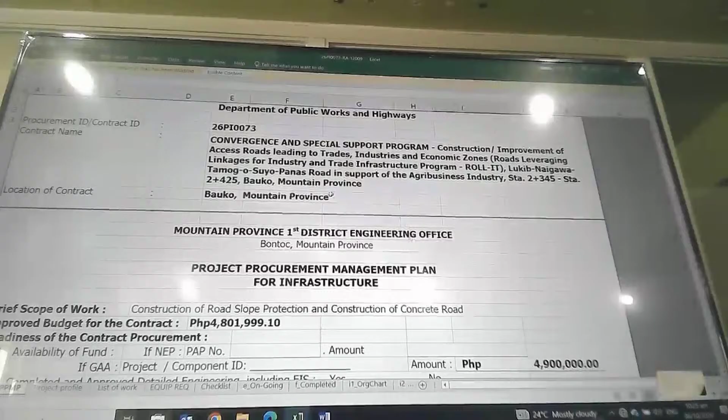So, what contract is it, Sir? So it's your turn, Sir Bob. The first project presentation today is under CSSP with contract ID 26PI0073.

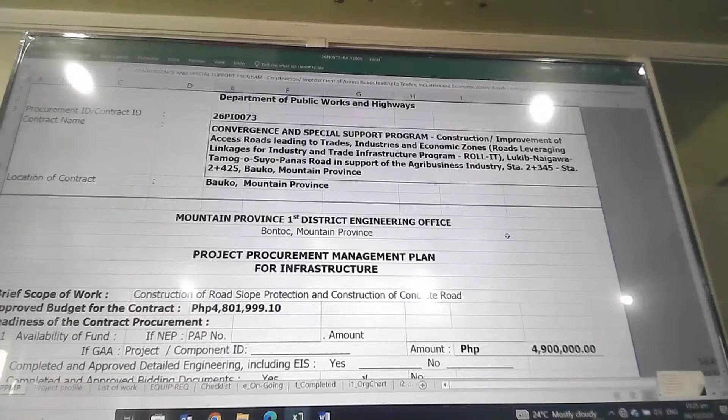Contract name: Convergence and Special Support Program, Construction and Improvement of Access Roads leading to trades, industries, and economic zones, Road Leveraging Linkages for Industry and Trade Infrastructure Program, Lukib-Naigawa-Tamog-o-Suyo-Panas Road in support of the agribusiness industry, Station 2+345 to Station 2+425, Bauko, Mountain Province. Location of contract is at Bauko, Mountain Province.

The approved budget for the contract is 4,801,999 pesos and 10 centavos, with a contract duration of 44 calendar days. Procurement method: competitive bidding.

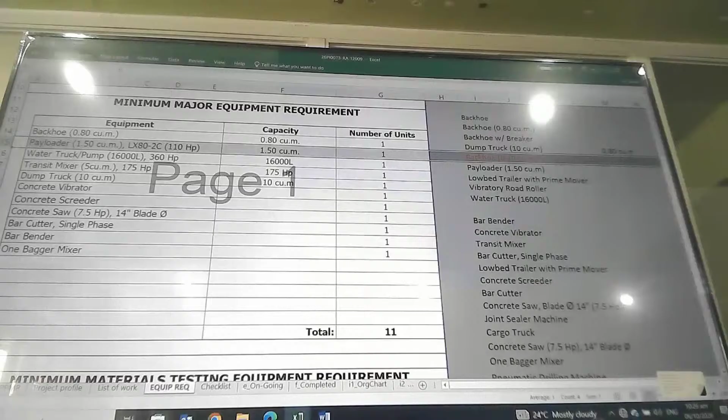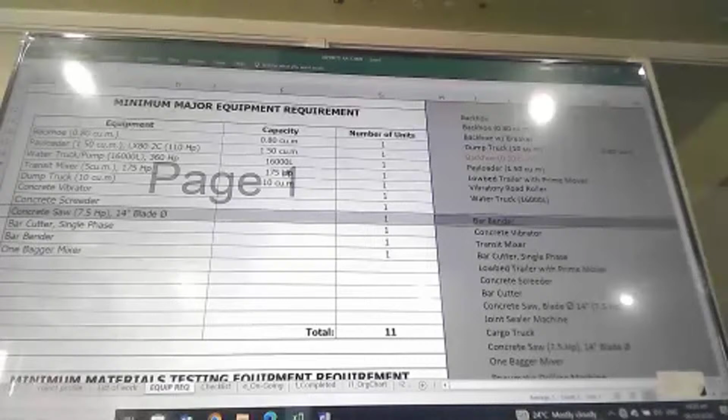For the minimum major equipment requirement, we have one backhoe (0.80 cubic meter), one payloader (1.5 cubic meter), one water truck, one concrete vibrator, one concrete saw (14 inches blade diameter), and one bagger mixer.

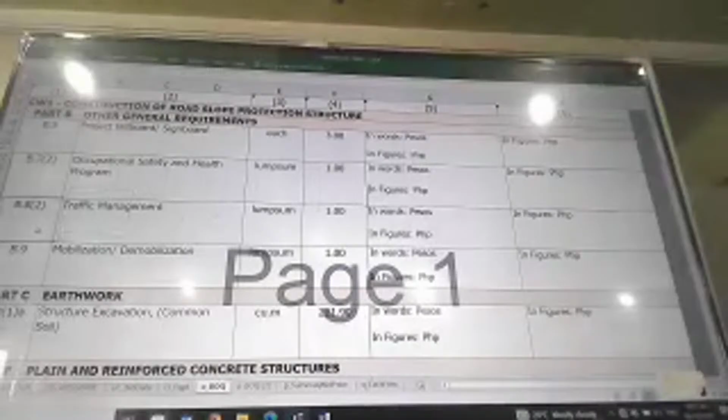For the bill of quantities, under Part B, Other General Requirements, we have item B.5 Project Billboard/Signboard - 3 each; B.7 Occupational Safety and Health Program - 1 lump sum; B.8 Traffic Management - 1 lump sum; B.9 Mobilization and Demobilization - 1 lump sum.

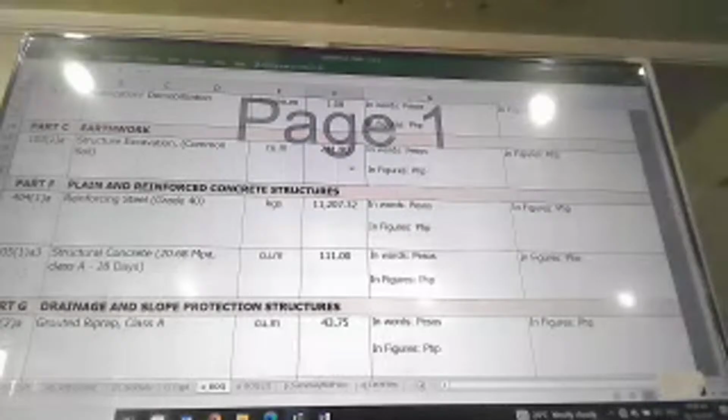And under Part C, Earthworks, we have item 103(1)A Structural Excavation, Common Soil - 211.9 cubic meters.

Under Part F, Plain and Reinforced Concrete Structures, we have item 404(1)A Reinforcing Steel Grade 40 - 11,207.32 kilograms, and 405(1)A3 Structural Concrete, 20.68 megapascal, Class A, 28 days - 111 cubic meters.

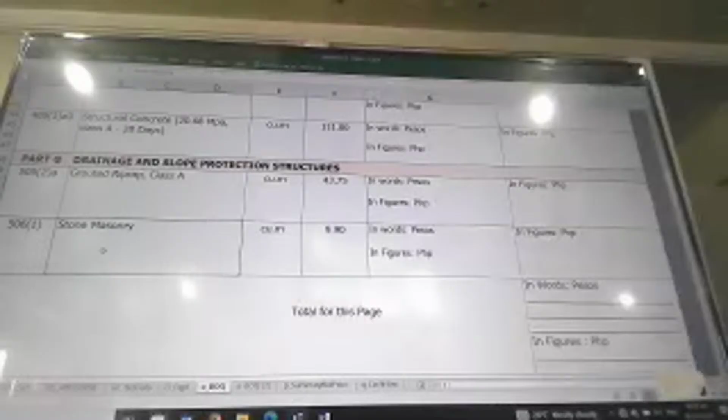Under Part G, Drainage and Slope Protection Structures, we have 505(2)A Grouted Riprap Class A - 43.75 cubic meters, and 506(1) Stone Masonry - 9.80 cubic meters.

Under CW2, Construction of Concrete Road, Part C Earthworks: item 102(2) Surplus Common Excavation - 949.50 cubic meters, and 104(1)A Embankment from Roadway Structure Excavation, Common Soil - 166.52 cubic meters.

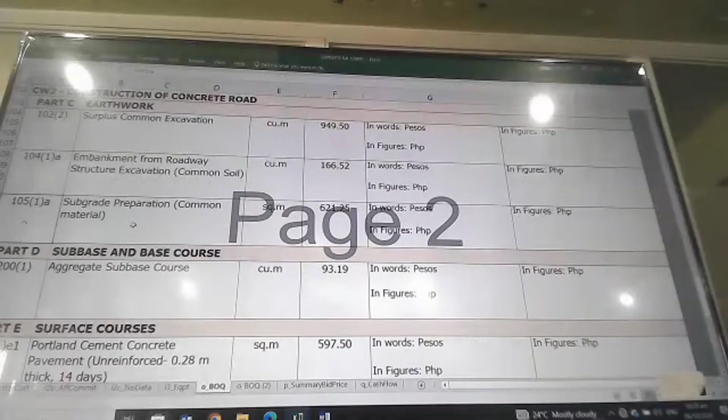105(1)A Subgrade Preparation, Common Materials - 621.25 square meters. Part D, Subbase and Base Course: 200(1) Aggregate Subbase Course - 93.19 cubic meters. Part E, Surface Courses: 311(1)E1 Portland Cement Concrete Pavement, unreinforced, 0.28 meter thick - 597.50 square meters.

The last one, Part H, Miscellaneous Structures: we have PIF 604 Curb and Gutter, cast in place - 44 linear meters.

So for the detailed engineering design plan of this project: Convergence and Special Support Program, Construction and Improvement of Access Roads leading to trades, industries, and economic zones, Road Leveraging Linkages for Industry and Trade Infrastructure Program (ROLIT), Luque-Naigawa-Tamugo-Suri-Panas Road, in support of the agribusiness, Station 2+345.

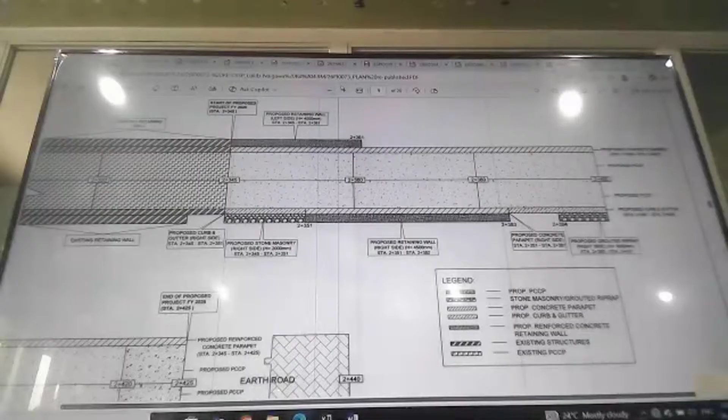So the end of the proposed project is at Station 2+425. Now for the cross-section.

So for the typical details of the retaining wall, we have the front elevation of the retaining wall and the RSB schedule and bar bending diagram. And we have the design parameters.

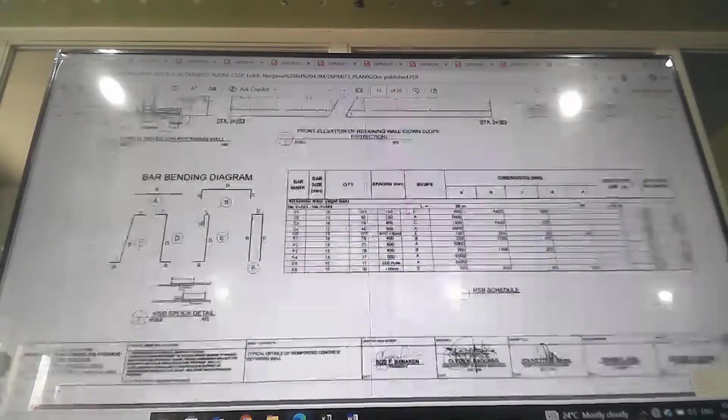We have the stone masonry elevation detail and the grouted riprap elevation detail. We also have the typical curb and gutter details, detail of the walls, and the tie bar details for the PCCP.

And for the concrete parapet, we have the reinforced details of the reinforced concrete parapet, the RSB schedule of the concrete parapet, and the bar bending diagram of the concrete parapet.

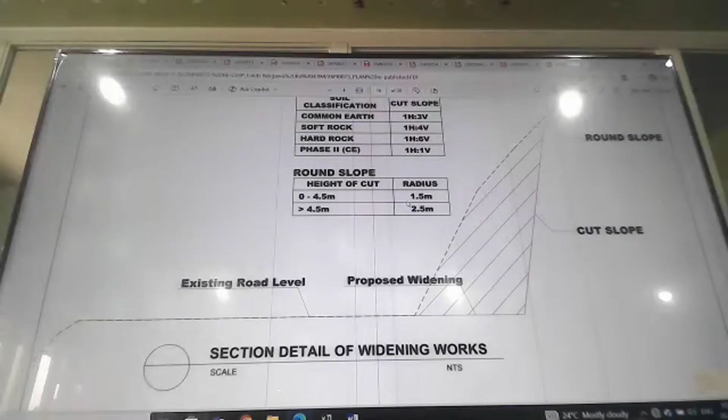So for the section detail of widening works. Next, we have the PCCP details.

For the billboard and billboard frame details, and for the traffic management layout.

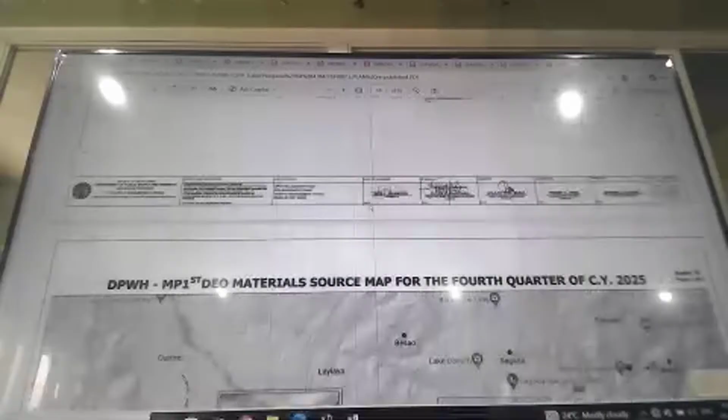For the aggregate source at Mangawa Baoko, ang Pinto, Slope Quarry, and for the boulders at Anuling Cervantes Ilocos.

So with the incoming materials selected from Mangawa Baoko, Mount ang Pinto, Slope Quarry.

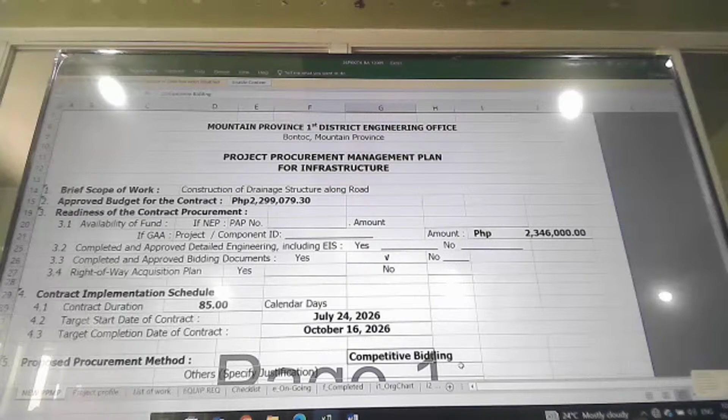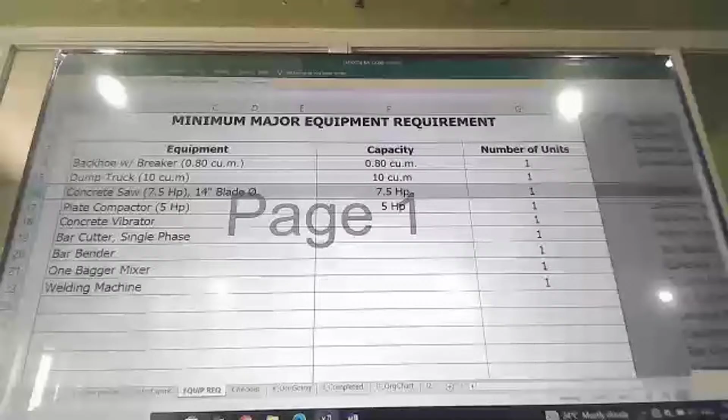For the minimum major equipment requirement, we have one backhoe with breaker, 0.80 cubic meter capacity, one dump truck, one dump truck 10 cubic, one concrete saw 14 inches blade diameter, one plate compactor, one concrete vibrator, one bar cutter single phase, one bar bender, one bagger mixer, and one welding machine.

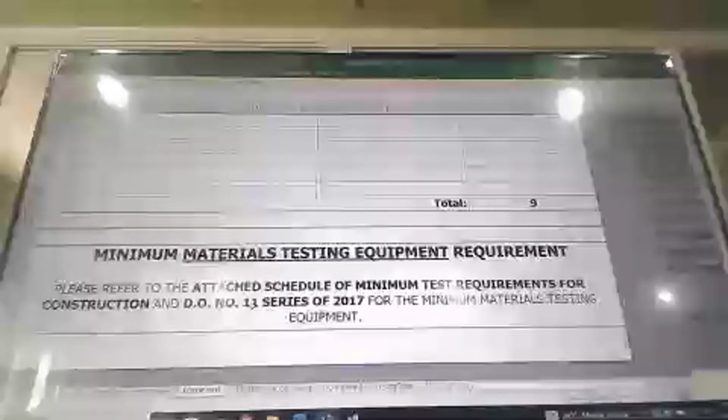With total units of 9 units. Please refer to the attached schedule of minimum test requirements for construction and D.O. number 13 series of 2017 for the minimum materials testing equipment.

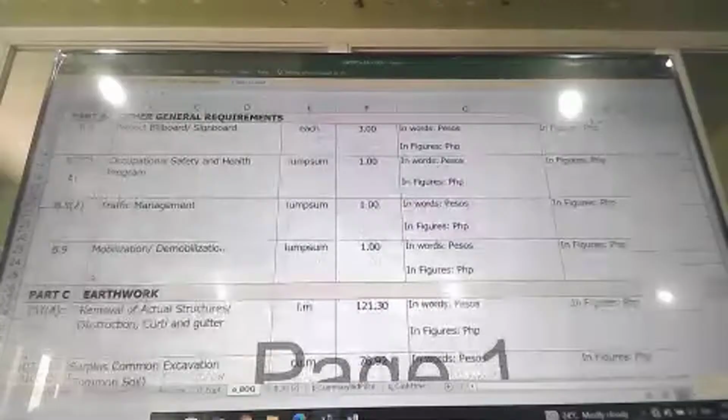For the bill of quantities under Part B, general requirements, we have item B.5 project billboard signboard, 3 each. B.7.2 occupational safety and health program, 1 lump sum. B.8.2 traffic management, 1 lump sum.

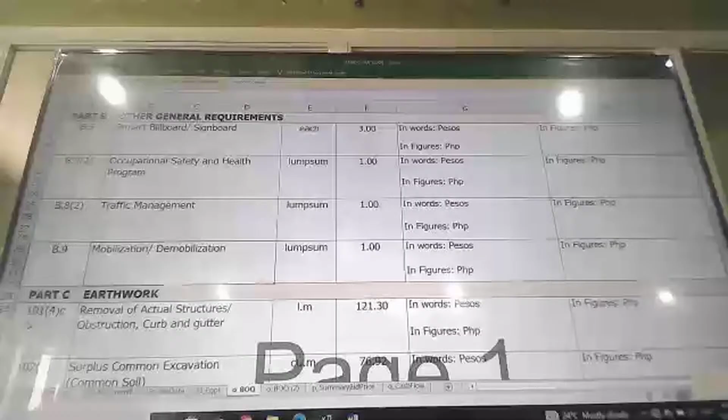Demobilization 1. Earthwork: we have 101 removal of actual structures, obstruction, curb and gutter, 121.30 linear meter. We have 102 surplus common excavation, 76.92 cubic meter. 103-1A structure excavation common,

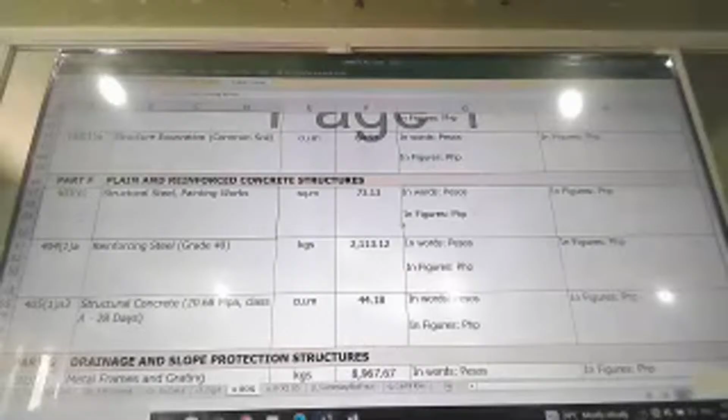84.52 cubic meter. Part F plain and reinforced concrete structures. Item 403-6 structural steel painting works, 73.13 square meter.

404-1A reinforcing steel reinforcement, 2,113.12 kilograms. 505-2A grouted riprap, 40.23 cubic meter.

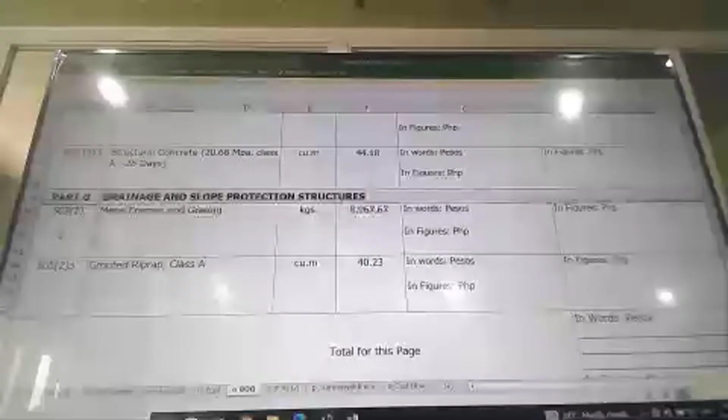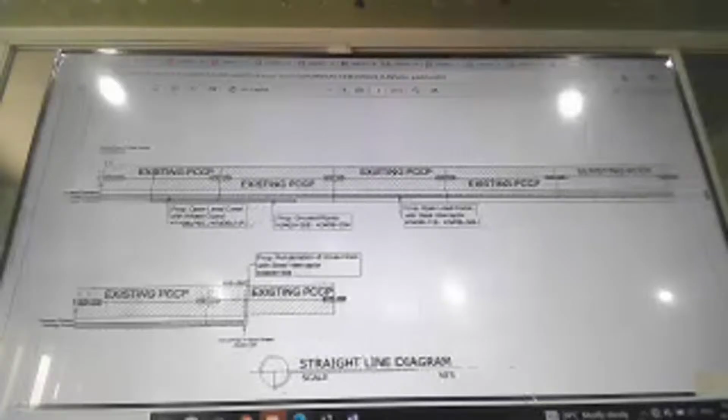For the straight line diagram, from kilometer 408 plus 368 to kilometer 408 plus 294, we have a proposed grouted riprap. And for the start of the project at kilometer 408 plus 265, we have a proposed open lined canal with wheel guard until kilometer 408 plus 316. And then from kilometer 408 plus 316 to kilometer 408 plus 384, we have open line, proposed open lined canal with steel interceptors.

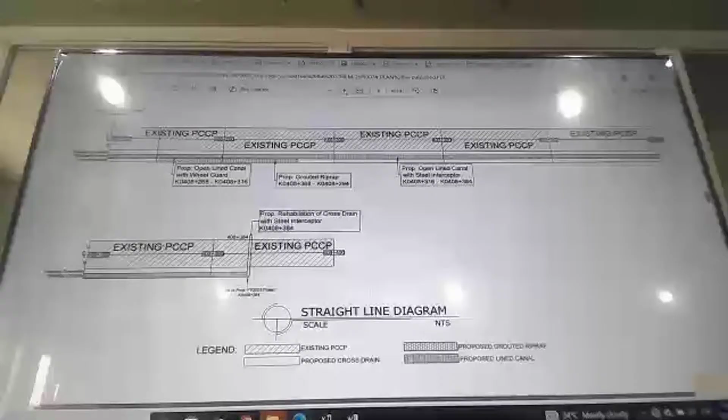And from kilometer 408 plus 384, cross drain with steel interceptor. For the cross sections,

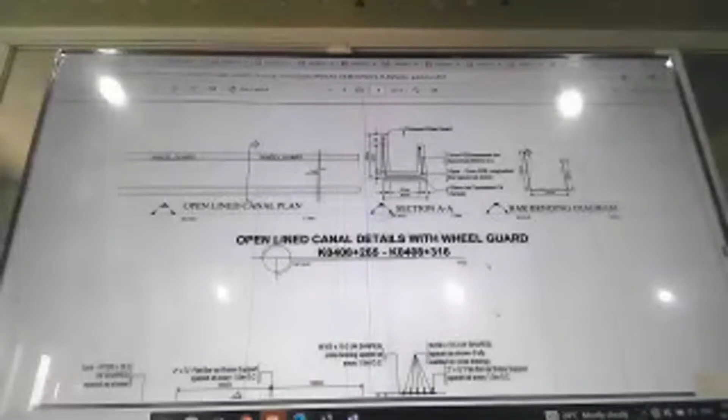Open line canal details with wheel guard from kilometer 408 plus 265 to 408 plus 316. The bar bending diagram, the sections, kilometer 408 plus 316 to kilometer 408 plus 384.

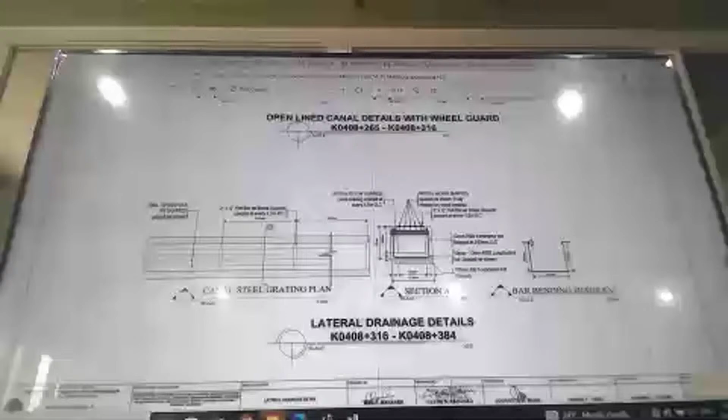And the elevation of line canal with wheel guard. And for the grouted riprap elevation detail from kilometer 408 plus 268 to kilometer 408 plus 295.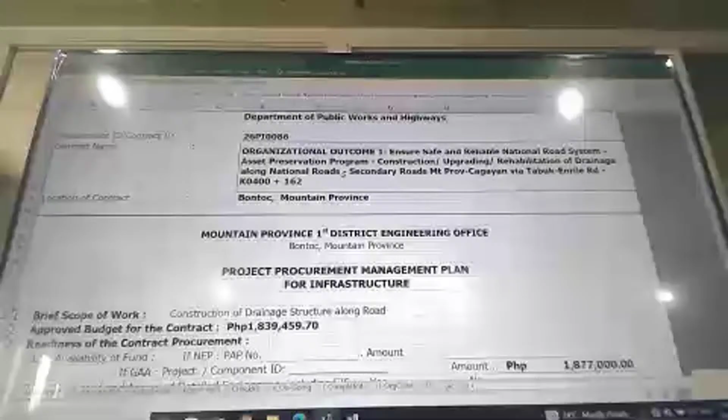26PI0086, contract name: Organizational Outcome 1, ensure safe and reliable national road system, asset preservation program, construction, upgrading, rehabilitation of drainage along national road, secondary roads, Mount Province, Cagayan via Tabuk-Enrile Road.

Kilometer 400 plus 162. Contract location is Bontoc, Mountain Province.

The approved budget for the contract is 1,839,459 pesos and 70 centavos. Contract duration is 71 calendar days.

Minimum equipment requirement: one dump truck, 10 cubic meter capacity; one backhoe, 0.30 cubic meter capacity; one bagger mixer; one concrete vibrator; one bar cutter single phase; and one bar bender.

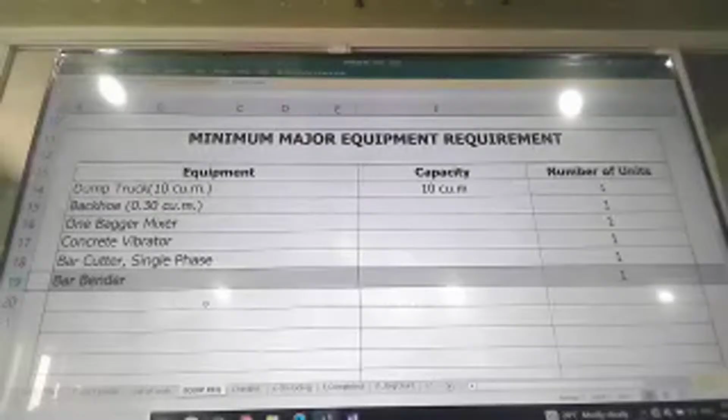Total of 6 units. Please refer to the attached schedule of minimum test requirement for construction, MDU number 11 series of 2017, for the minimum materials listing equipment.

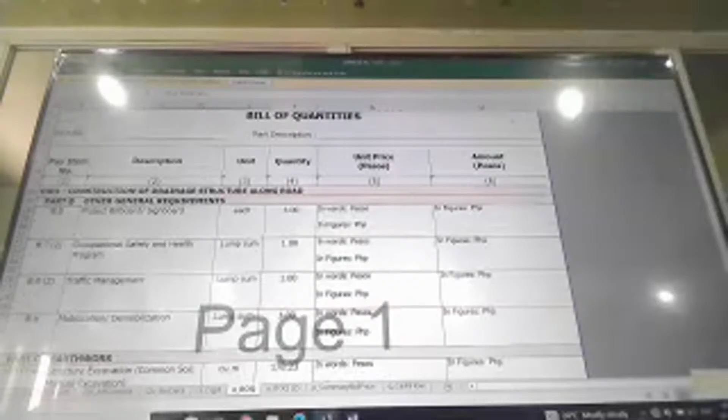For the bill of quantity, for civil work 1, construction of drainage structure, part B, other general requirements, item B.5, project billboard signboard, 3 each.

B.7(2), occupational safety and health program, 1 lump sum. B.8(2), traffic management, 1 lump sum. B.9, mobilization, demobilization, 1 lump sum.

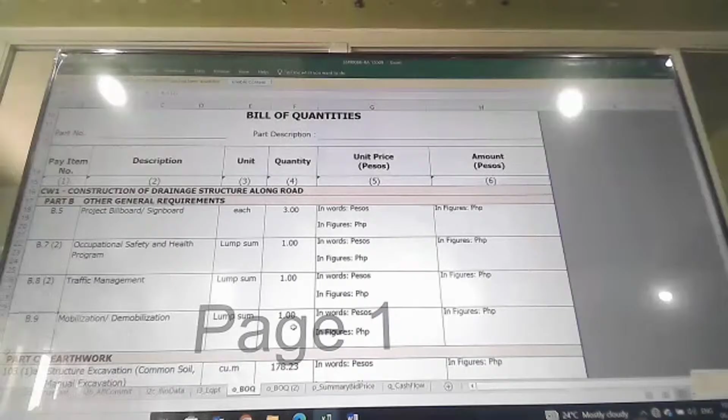Under part C, earthwork, item 103(1)b, structure excavation, common soil, manual excavation, 20.71... 178.23 cubic meter.

Part F, plain and reinforced concrete structure. Item 404(1)a, reinforcing steel grade, 2,488.27 kilograms.

405(1)a3, structural concrete, 20.68 megapascal class A, 28 days, 47.72 cubic meter.

For part G, drainage and slope protection structures, item 505(2)a, grouted riprap class A, 103.60 cubic meter. 506(1), stone masonry, 30.60 cubic meter.

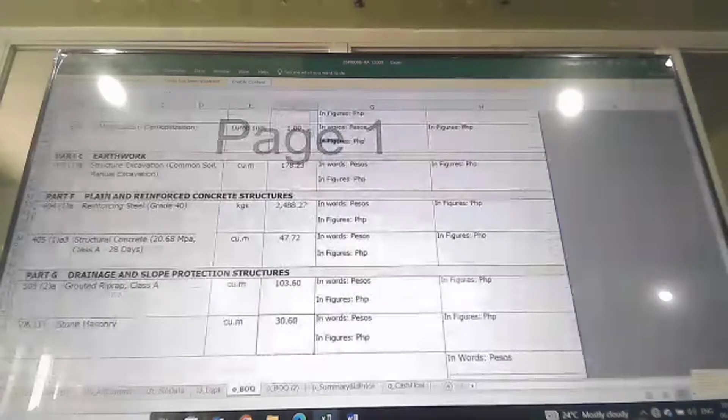Plan for the Organizational Outcome 1, ensure safe, reliable national road system, asset preservation program, construction, upgrading and rehabilitation of drainage and national roads, secondary roads, Mount Province, Cagayan via Tabuk-Enrile Road, kilometer 400 plus 162.

Location: Bontoc, Mountain Province. Station limits, station 0 plus 00 to station 0 plus 080. This is the drainage downstream. Net length is 80 linear meters.

That's for the cross section, typical section, dimension—

So, open canal with the proposed grouted riprap from both sides. Dimension of the open canal is 150 mm.

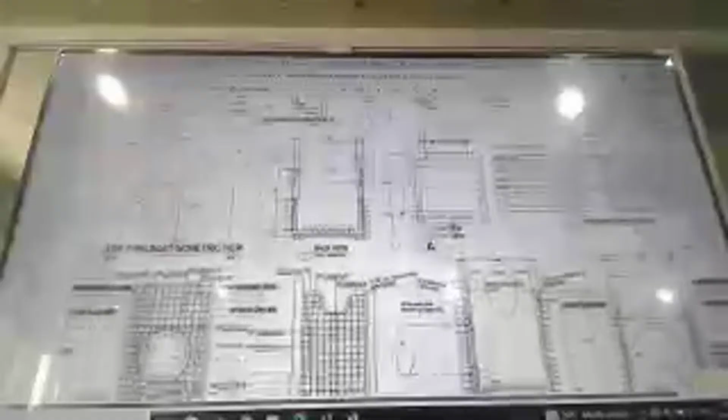For the inlet section detail, bar bending diagram for inlet.

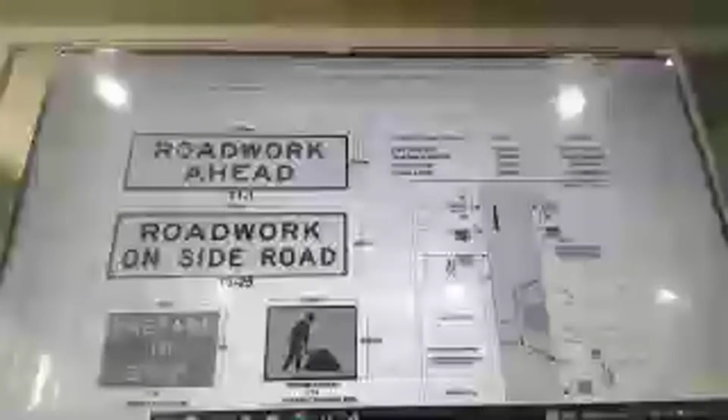For the traffic management layout, and the DPWH and Pavement frame.

For the material source now: cement source, Bontoc Hardware. For the RSB, Manila. Coarse and fine aggregates, Bontoc. Same with the boulders.

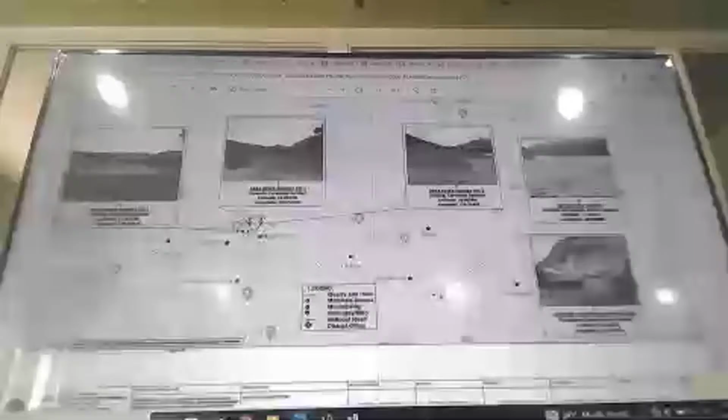Thank you, sir. Bob, kindly return to the traffic management for reminders. Please be informed that this traffic management is still non-reflectorized.

Don't worry, because it is already included as an item. So please comply—this is very important in our partnership in development. Please note it on this traffic management. Thank you.

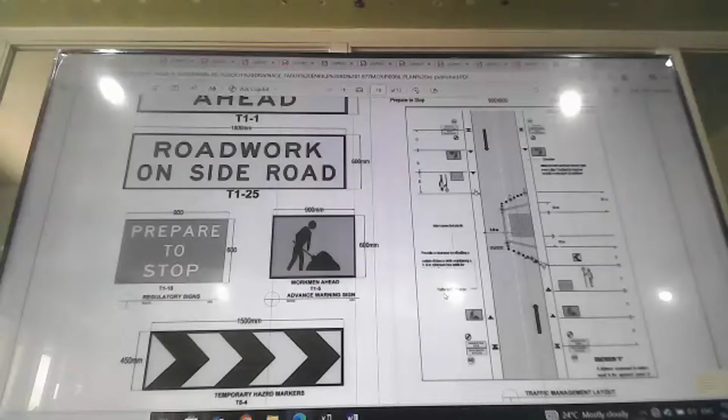So maybe for the information of our prospective bidders, may I call for the contractor who needs to attend? Okay, so Robert Tekliga, Inabo Construction.

Sir Renato, what can you provide? Let's pass to the second level.

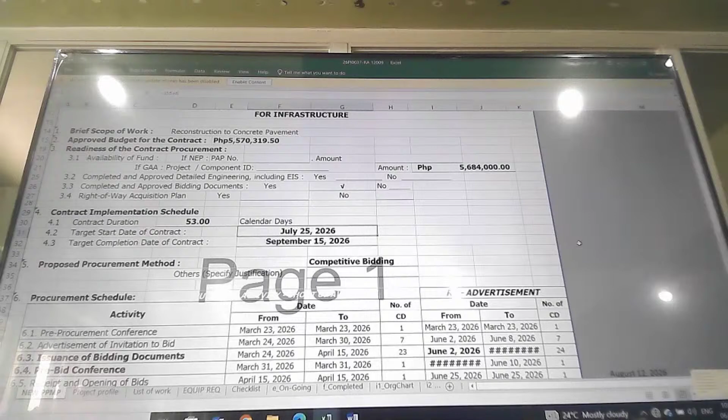RE-ITB. Planning section, who made the design for this 26/0037? 26/0037, Bayatew, damaged roads, secondary roads, asset preservation, reconstruction, upgrading of damaged roadway.

Sir Kenneth Libawan, what particular contract ID do you have? One for four.

For the project 25PI0144, with a contract name of Capital Outlay QRF Rehabilitation of Disaster-Related Infrastructure and Other Facilities, damaged infrastructure due to Tropical Cyclone Nando.

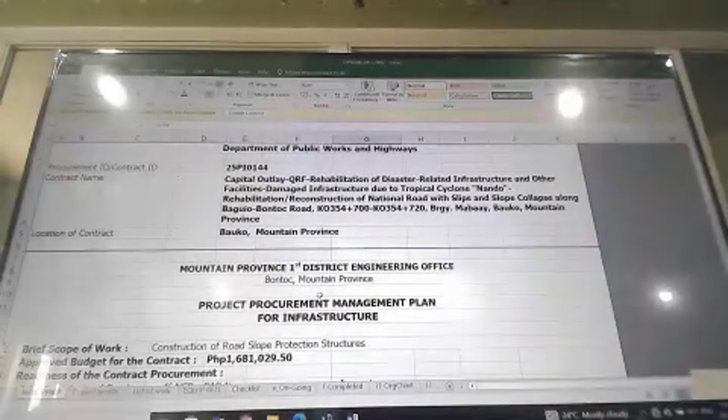With an ABC of 1,681,029 pesos and 50 centavos, with a contract duration of 35 calendar days.

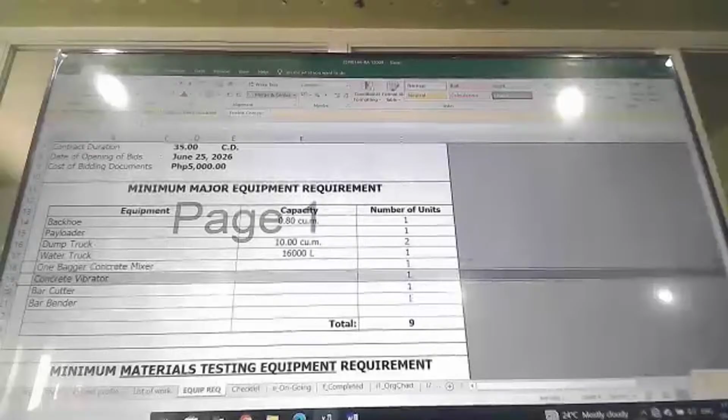1 bagger concrete mixer, 1 unit; concrete vibrator, 1 unit; bar cutter and bar bender, 1 unit; with a total of 9.

For the quantities: item B.5, project billboard signboard, 2 each. B.7(2), occupational safety and health program, 1 lump sum.

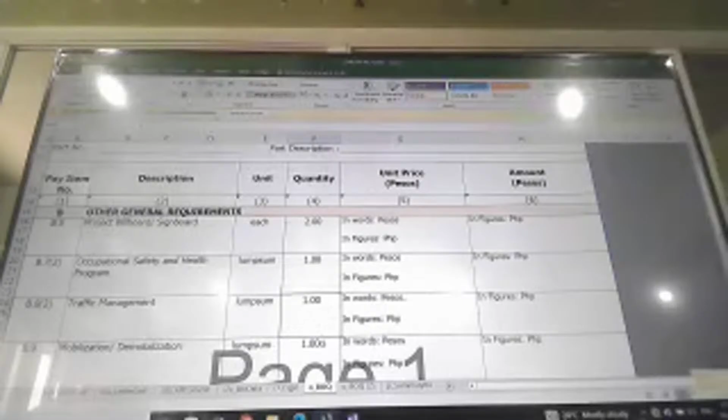B.8(2), traffic management, 1 lump sum. B.9, mobilization, demobilization, 1 lump sum. For Part C, earthworks: 10318, structure excavation, common soil, 133.81 cubic meter; 1044, earth berm, 19.63.

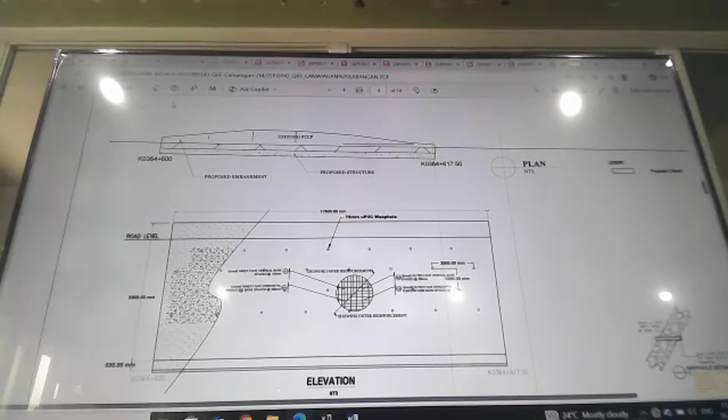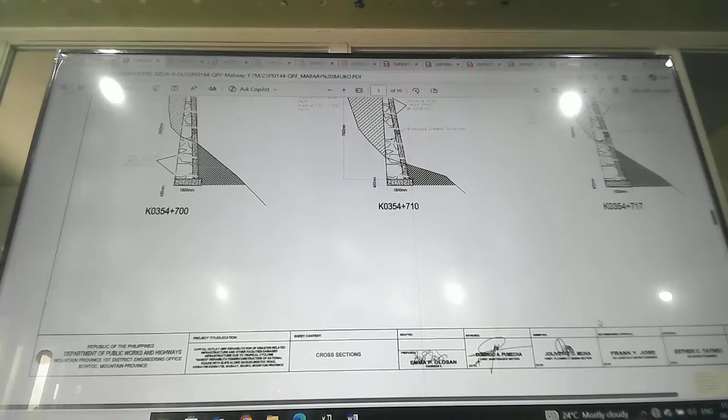About the PCCB, for future funding. What kind of materials is there? Because earth berm. It will be from excavation. I think the excavated materials is not suitable for earth berm. Yes, sir, because that is why our structures fail or collapse due to inconsistency. Yes, sir, so please check on that.

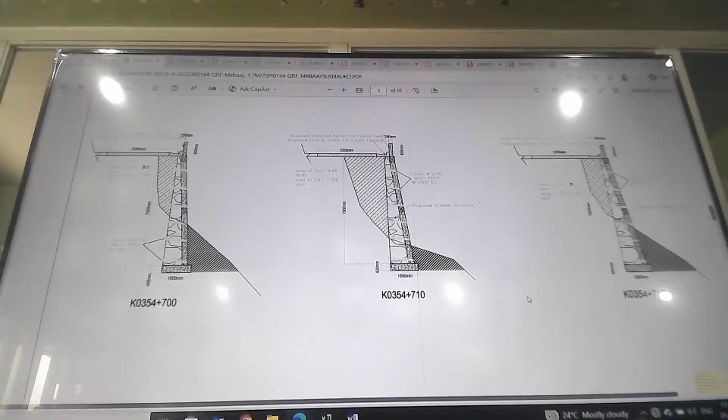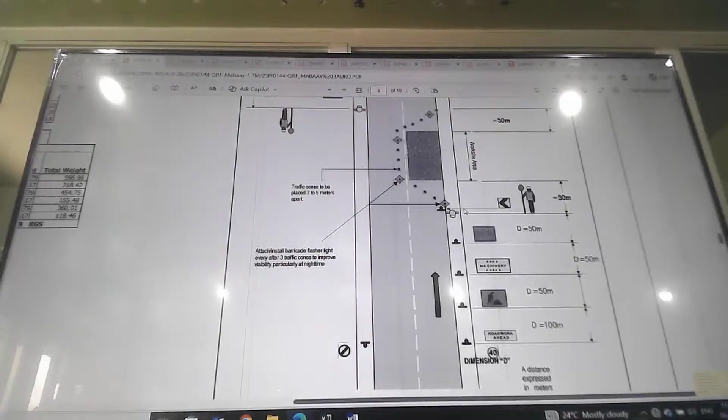And for the project billboard, it's the same. That's all for 25 PI 0144.

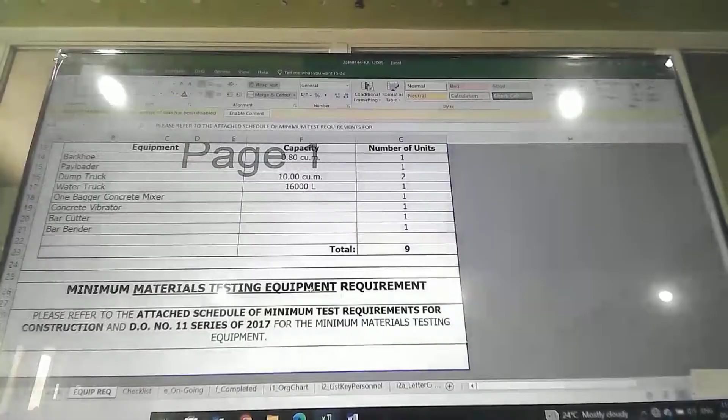Thank you, Sir Nelson. From our perspective, Peter, do you have any comments or clarification for these projects? For the excavator, 0.8 cubic capacity. Any more comments?

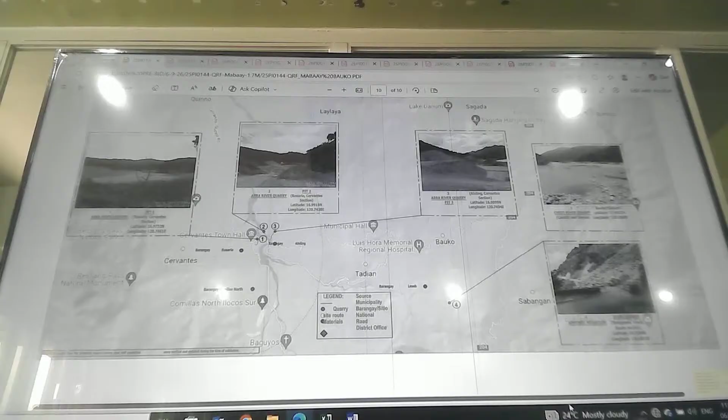For the material source map, for the unit cost derivation of cement, the source is Abatan Baupu. For the RSB, Manila. For coarse and fine aggregates, Bontoc. For the earthwork, Pinto Quarry site. And for the boulders, Bontoc.

Now, I think we will finish the maintenance projects, then we will go on the checklist. We will focus on the checklist for the two projects. Thank you.

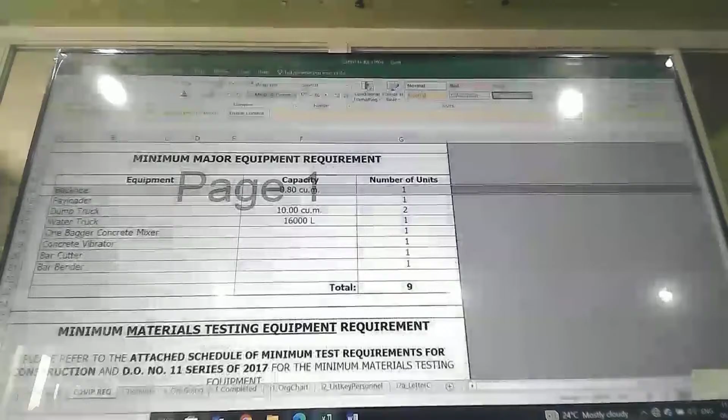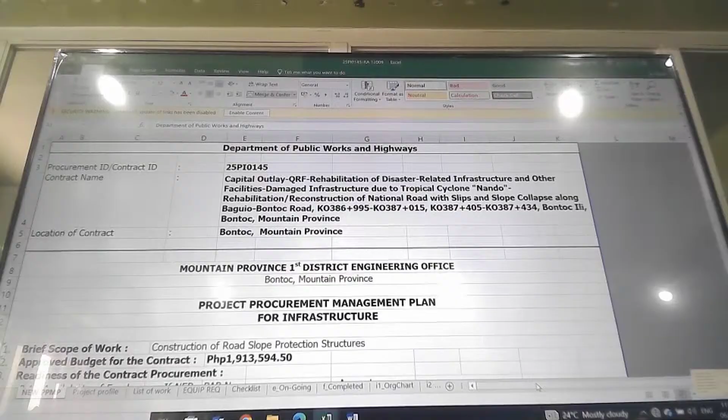For ID 25 PI 0145, with a contract name of Capital Outlay QRF, Rehabilitation of Disaster-Related Infrastructure and Other Facilities, Damage Infrastructure due to Tropical Cyclone Nando, Rehabilitation, Reconstruction of National Road with Slips and Slope Collapse along Baguio-Bontoc Road, kilometer 386 plus 995 to kilometer 387 plus 015 and kilometer 387 plus 405 to kilometer 387 plus 434, Bontoc Ili, Bontoc, Mountain Province.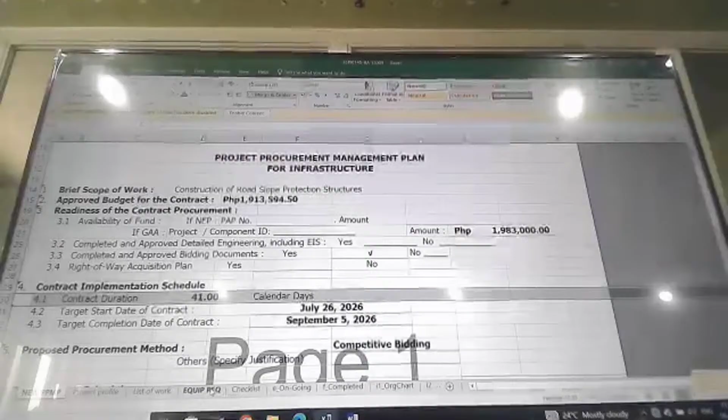With a contract ABC of 1,913,594.50, with a contract duration of 41 days.

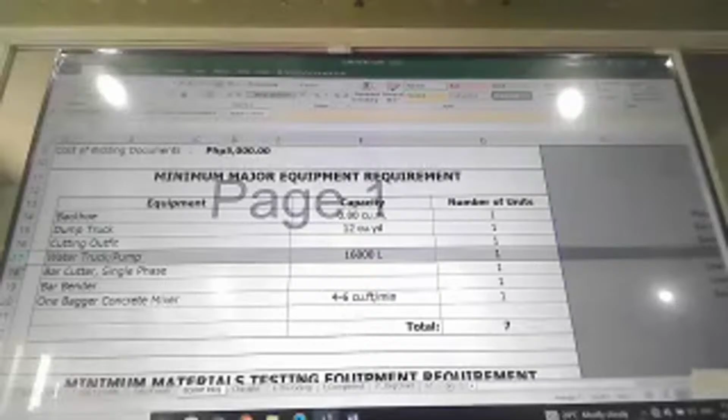For the minimum equipment: backhoe 1 unit 0.8, dump truck, 12 cubic yards capacity, cutting outfit 1 unit, water truck 1 unit, 16,000 liters, bar cutter single phase 1 unit, bar bender 1 unit, 1 bagger mixer 1 unit.

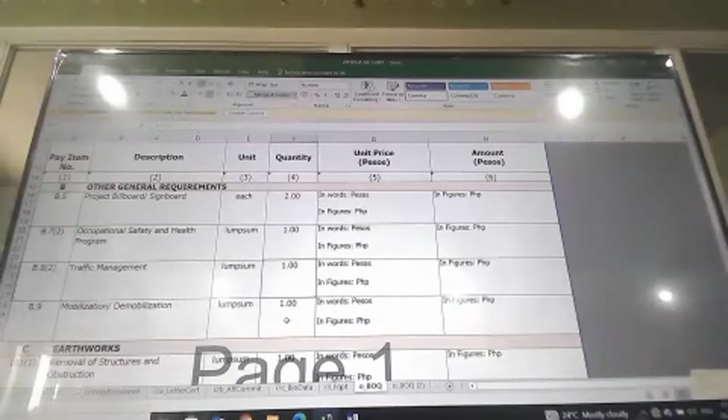For item descriptions, for other general requirements: B.5 project billboard signboard, 2 each; B.72 occupational safety and health program, 1 lump sum; B.82 traffic management, 1 lump sum; mobilization, demobilization, 1 lump sum; 1011 removal of structures and obstruction, 1 lump sum; removal of actual structures, obstruction, 0.23 meters thick PCCP, 72.55 square meters; 1031A structure excavation, common soil, 214.45 cubic meter.

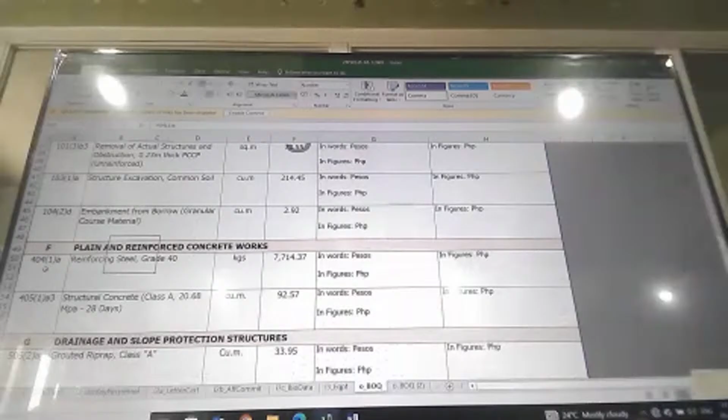1042B embankment from borrow, granular course material, 2.92 cubic meter. 4041A reinforcing steel, grade 40, 7,714.37. 4051A3 structural concrete, 20.68 MPa, 28 days, 92.57 cubic meters. And lastly, the grouted riprap class A, 33.95 cubic meters.

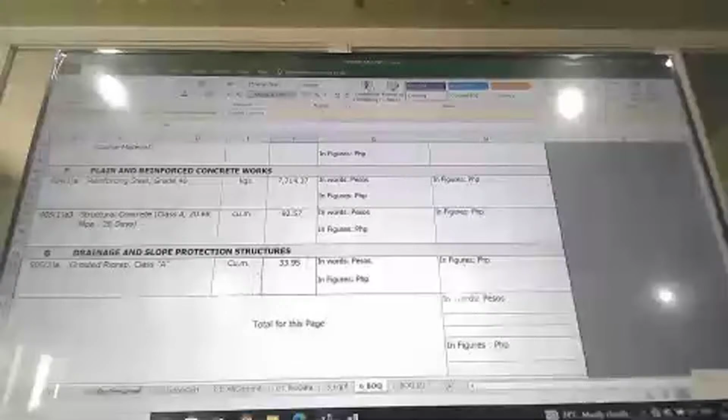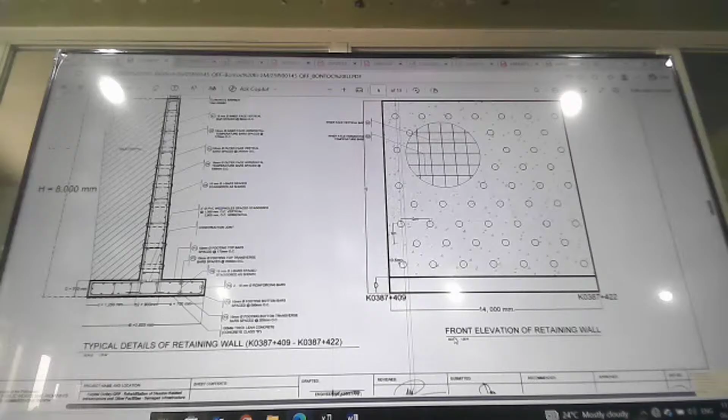For the plan, with the protection. So for our retaining wall structure, with a total height of 8 meters, including the footing, with a base width of 2.85 meters, stem is 0.9 meters, and at the upper, 200 mm.

Next, for the retaining wall structure, it is from kilometer 387 plus 409 to 387 plus 422, with a total length of 14 meters. For the crib wall structure at kilometer 387 plus 000 to kilometer 387 plus 010, with a total length of 10 meters, with a total height of 7.6 meters, 7.5 meters.

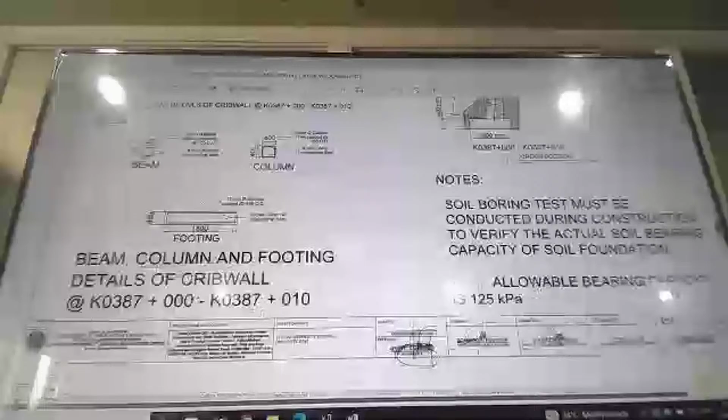For this, the affected area, which is the existing retaining wall. For the dimension of the crib wall, the base width is 1.8 and thickness is 0.4. Beam is 0.4 by 0.3 and column of 0.4 by 0.4. For the typical cross section, earth is proposed embankment.

The same for the traffic management, as discussed a while ago, we will just observe the same. That's all for 25 PI 0145. Thank you.

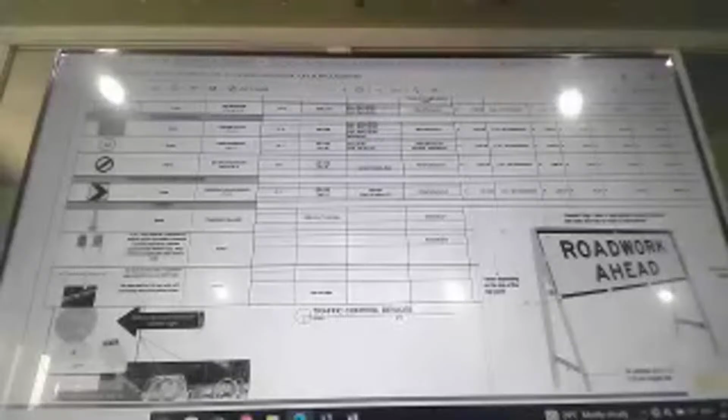Any clarification from our prospective bidders? None? Thank you very much. So we will now proceed, we will finish the maintenance projects. That's it.

Contract with a contract ID of 25 PI 0143. Rehabilitation of disaster-related infrastructure and construction of national road with slip and slope collapse along Baguio-Bontoc Road, kilometer 364 plus 630, Barangay Kamatagan, Sabangan, Mountain Province, with an ABC of 2,076,679.80, with a contract duration of 40 calendar days.

For the bill of quantities, for item...